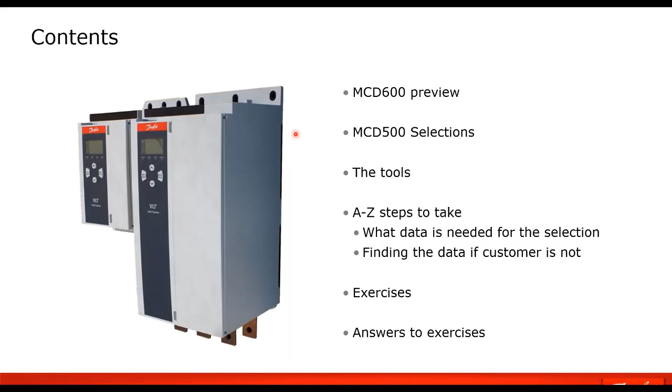We'll cover the tools that we use, and also some of the steps we take using what data we have and some customer information to pick the right soft starter. Then I have a few exercises, some examples of choosing it utilizing some of these tools, and then I'll go over some of the answers and some of the data that we found to help pick these particular sizes.

First off, this particular soft starter is the MCD 600. It's our newest soft starter in our series of 3-phase soft starters. It offers a lot of advanced features for motor control, protection, and fixed speed applications. I do want to mention that in our marketing of this, we call it the single speed drive. We have VLTs or VFD drives, which are variable speed, but soft starters are typically 1 speed.

I do see there's a question there: what COM cards do they have? Profibus, Profinet, Ethernet IP. I can go over some of the other features and options that we have later on, but yes, we do have Ethernet IP, Profinet, and so forth. I do have a secondary presentation if we have time to go over different features. But in this one, we're going to start off with selecting or properly sizing one.

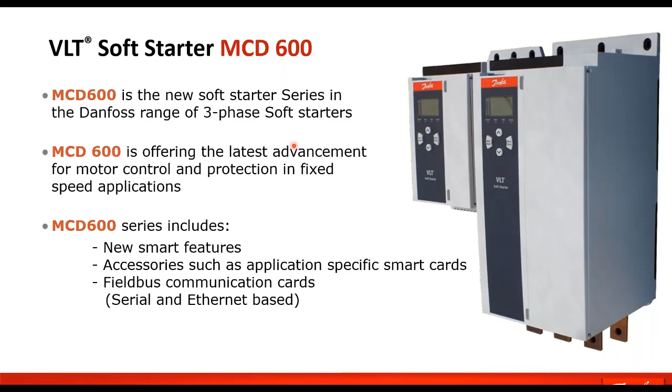Other features that it has are smart features, application type features, and fieldbus, both serial and Ethernet based. In this particular series, we have different current rating soft starters, and that is part of the type code. In most soft starters, you select them based on their current rating, and that current rating varies based on the starting currents that we need.

This particular soft starter has internally bypassed contactors, and what that means is this is a voltage limiting soft starter, and with the voltage limiting it is also current limiting. That's how we soft start a motor. But once it's done going through the starting profile, we get to full speed and current drops off. It then has contactors on all three phases that close, so the motor is essentially connected to the line through the soft starter.

The soft starter is still monitoring current for protection and other application features. This particular soft starter is considered a closed loop soft starter, as it is utilizing current feedback through current sensors inside to control the current that is being fed to the motor.

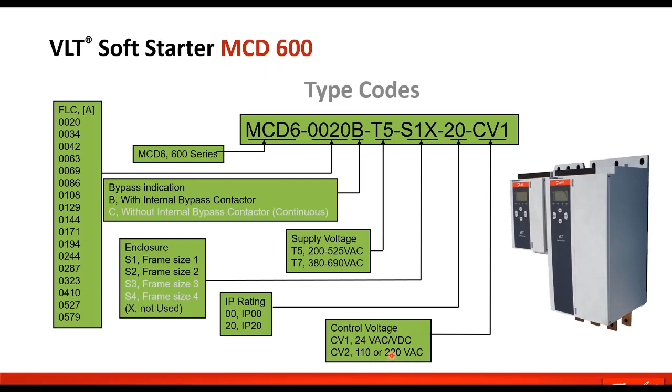Hey, Joey, a question came in. Yes. Does this soft starter have 6 thyristors? This soft starter is using thyristors or SCR controls. There are 3 modules, but yes, it's a total of 6. So there's a positive and negative for each phase, so full wave control. Some soft starters, which we do have a series, the MCD 202, only have 4. The middle one's just a straight through bar. Not all 3 phases are controlled using the control loop, but this particular one is all 3 phases.

So basically, selecting your soft starter: one thing, the size of the soft starter must match the motor and the application. Select the soft starter that has a current rating at least equal to the motor's full load current rating. Now, some of that can move around based on different things.

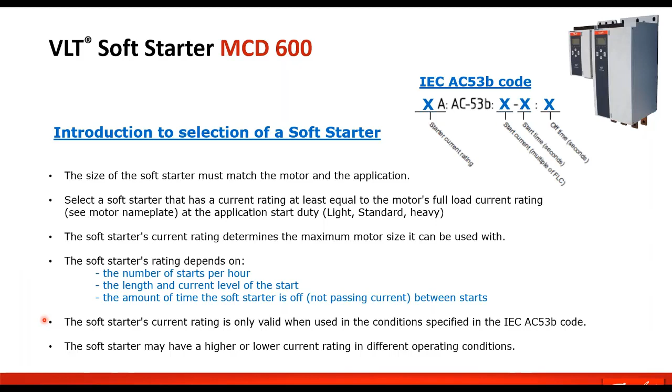And then there's also an off time. This is the balance between heating of the soft starter for how long it took to start, and then cooling time, and that has an effect on our selection. So the soft starter's current rating does determine the maximum motor size it can be used with, and that's in the table that I will show. Let's see, I kind of went through all this already.

So moving on, some of the tools that we have for the soft starters: communication setups, setup tools, which is our Danfoss MCT10 setup software. I will review that with you. WinStart. WinStart is a sizing program.

Yes, go ahead. A question came in regarding that. What are the communications options? Do we offer Profibus, Profinet, Ethernet IP? What are the options? Okay, let me just skip on over to that here.

Let's see. I lost my control panel stuff because I was clicking on something. Give me 1 second. View. There we go. There we go. Can you see this one, the feature set?

Yes. Okay. So over here, as optional features, the serial communications shows that we do have DeviceNet, Modbus RTU, Profibus through these serial comms, and then over Ethernet communication, we have Ethernet IP, Profinet, and Modbus TCP option cards.

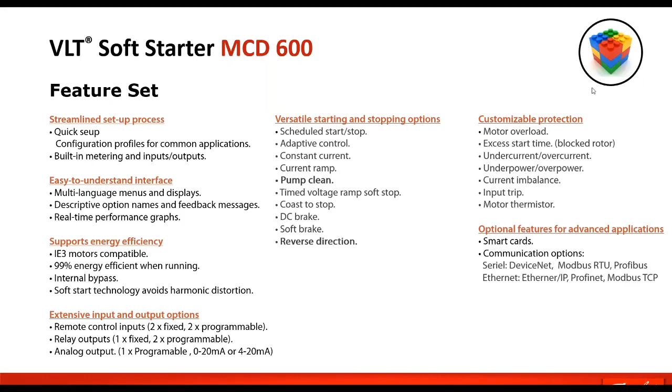All right. Great. And a question came in, how does it accomplish the reverse direction? It is another firing sequence, because yes, we are connected to the input. Of course, it has a clockwise rotation, but that's why I call it a kind of jogging. So it fires the SCRs in a manner that is mimicking a firing order that the motor is seeing, that is making the soft starter run backwards. I don't know if I'm explaining that well, but that's my take on it, that it fires out of order when the peak of the wave's coming by to make the motor start jogging backwards.

Okay. Are you seeing the screen now that says the tools? Well, I guess I can actually see my audience view. Ah, yes. Okay, I can see where I'm at. All right. Any other questions before I move on? Okay.

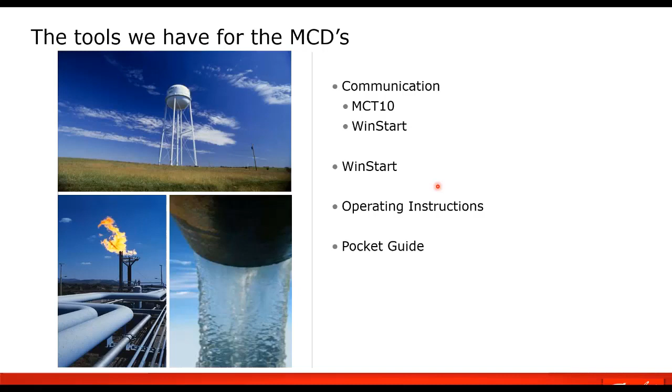So MCT10 is our setup tool that we use for setting up drives, but we can also use it to set up soft starters. In the case of the MCD 600, we have implemented that back in version 4.40, and I believe we're at 5.10 now. But at any version since then, if you already have MCT10, you have that function already.

Now, in the case of the MCD 600, you do have to add a soft starter connection, and I will show that here. Oops, come on. There we go. So under network, you can add and remove, and there is an add function for different types of connections, as well as we can do Profibus, serial, Ethernet connections to drives, and through a wireless LCP, but there is an Ethernet connection or a serial connection to soft starters.

And it will say serial AUCOM or Ethernet AUCOM. You pick that out and you can give it a unique name. In my case, I just called it soft starter. And then you can add to it a soft starter, which I've already done here. I just called it soft. Pick a size and you get the parameter list in here. Now with the 600 series, the parameters are loaded and saved via a USB connection, or a USB thumb drive file functionality.

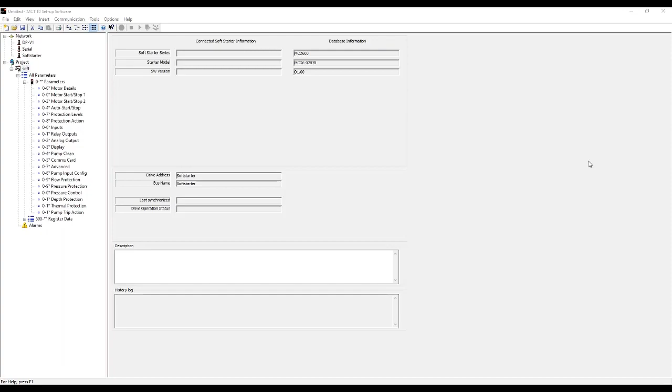Let me change back. Where was I? Oh, not on the presenting.

There we go. So through a USB thumbstick. So as you do your files, you would, okay. So again, once you have all your parameters set, you can right click on the project or on the MCD and you can export it to a parameter file that can be loaded on the USB stick. Same way in the soft starter, you can pull the parameters and import it into MCT10.

Go back here. The tool is free. The MCT10 setup software is free to download on our Danfoss Drives website.

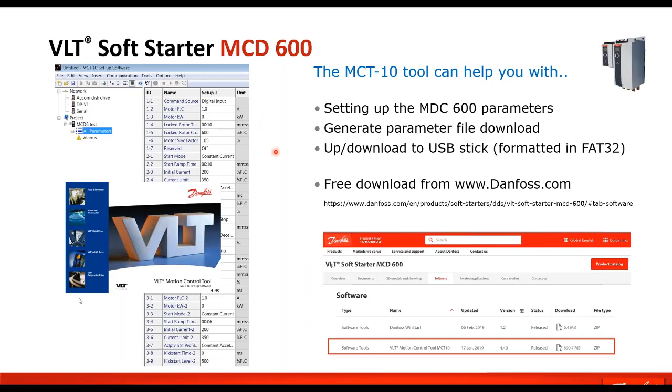Another tool that I've mentioned is the WinStart program. There are two available out there. There's a WinStart for our older generation of soft starters, the MCD 200 and 500. And then there's one now for the MCD 600 and more updated version. It has a couple of different functionalities built into it. You can use it to find the max full load current of a particular soft starter if you have one. You could also use it to select a model for a certain application.

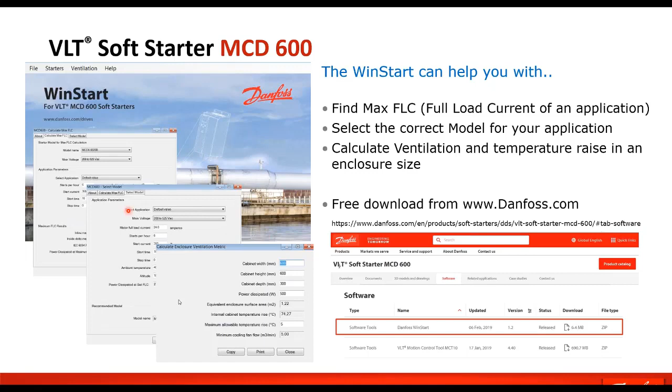One thing is we were mentioning earlier as far as how much starting current do I need for the application. In the program, you can load it if you know already, but there is a selectable application and it will autofill typical things. It will tell you what the starting current is, and it will fill in some times, but you can modify these settings and it will change which soft starter is proper for that particular application. This is again a free download on our Danfoss Drives website.

Utilizing this tool, in finding the full load current, you pick a model, the voltage. You can pick an application, it will fill this in, or you can enter it in and it will give you the ratings as we're talking about down here. It will also give you the dissipated watts at full load current for sizing panels that you're putting it in. There is also a panel sizing or airflow function built into this new version of WinStart.

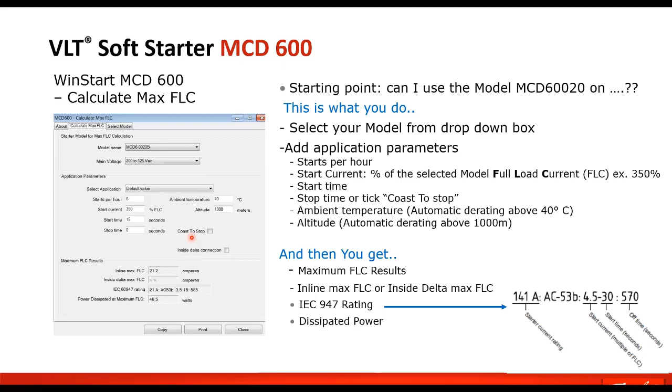So in this one, as it shows, selecting the model, again, you can select an application, the voltage rating, and you can select the motor rated current in here, and it will fill in these, but you can change the starts per hour. It will autofill in the starting current, but you can change that if need be, the starting time necessary, stopping time, or if you're coasting to stop, the ambient temperature, and the altitude. And it will give you the power dissipated here and the model number at the bottom. You can also select an inside delta connection.

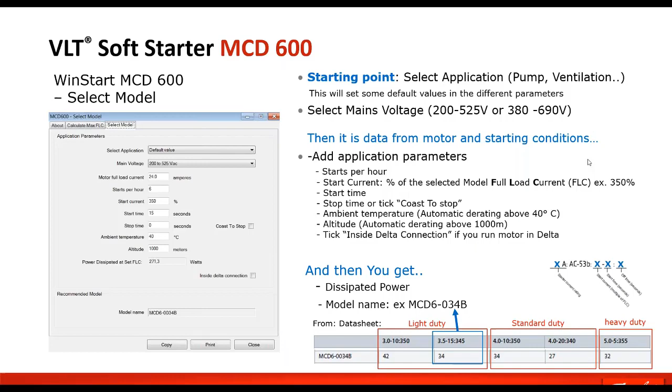One of the questions I get is, what is an inside delta connection? Some people know, some people don't. I was looking actually a little bit for what is an inside delta connection. I did find a pretty good explanation here from one website. Our friend Google can find all, but an inside delta connection is a 6-wire motor. Generally, it's got the 3-phase windings, and they are individual. You can get to both sides of them. Typically designed for use with star delta starters. This actually helps if this is the type of motor. You can use a soft starter with it instead.

The importance of selecting that is, because it's only handling kind of half the current going through, you can get away with a smaller soft starter. That's why that is a selection for picking the soft starter. If it's a star delta, you can basically almost half it in a way. Kind of a look at how a star delta connection is: as you have the 3 connections, it will connect it in a star for starting and then change over to delta for run. When you're connecting a soft starter, we are in the delta mode, and then just limiting current for the starting.

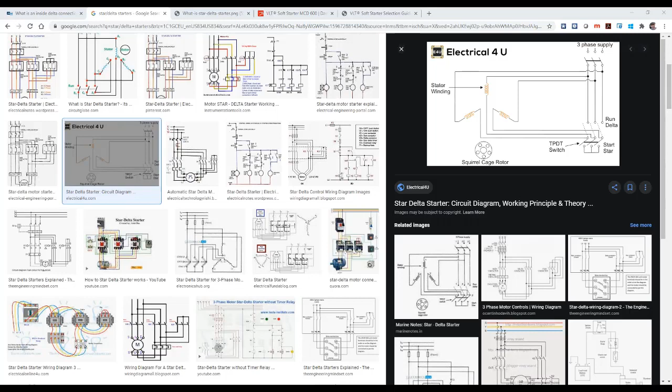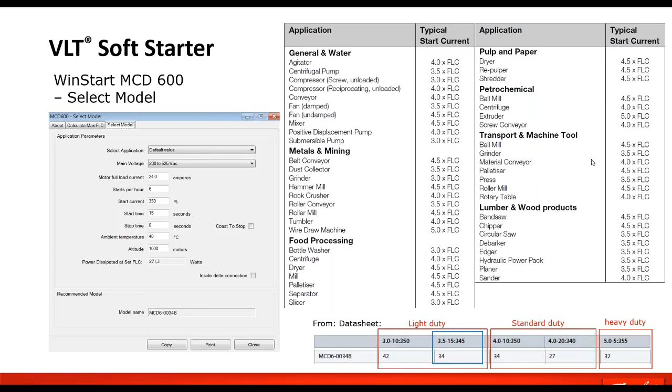This is one of the tables that I have that's in one of my older manuals. It does give general different applications and what is the typical starting current for each application. Picking it in the WinStart will do the same thing. It will fill in these typical numbers. There's also some guides that we have available. Let me find one here. There's one that I did share. One of the guides I want to bring up is this guide here. It has an easy table based on some horsepowers, but you do have your full load current ratings and then which soft starter it is.

Now these tables here are assuming a couple of things. These selections will get you right about where you need. This is kind of a handy guide for picking, but sometimes it will be at least a little bit larger. I would use the WinStart to get a more accurate selection, but if not knowing some of the things as far as the ramp time and starts per hour, this is a pretty good table for picking.

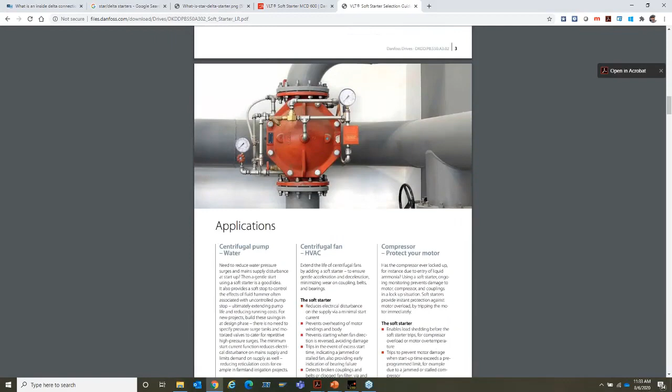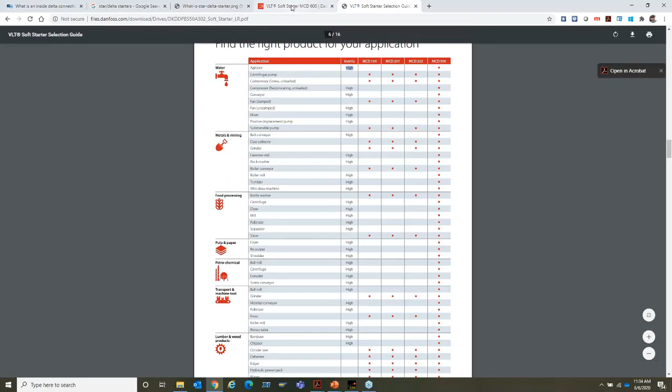Again, we get to the different duties, and this is where some of the selection guides that we have out there will have the same kind of situation based on different types of applications. This one goes by inertia, which I would say is more the weight, the more current it needs to start. So this would be a heavy duty, and the ones not listed would be a standard one. With this in combination with a table, whether it's standard duty or heavy duty, which soft starter do I pick? But again, we always pick them in relation to their current ratings, but current and horsepower kind of go hand in hand.

Another function in the WinStart software is the ventilation enclosure cooling calculator. You can calculate based on metric units or imperial units, inches or degrees Fahrenheit. In there, you put in your cabinet size, the power dissipated, which we found from the soft starter itself, and then it will give you the enclosure surface and the internal rise. In this one, it shows 74.3. So this would be the temperature in degrees C in this particular case, with no fans. But if we need it to not go higher than 5 degrees rise, then it tells you the minimum airflow that you need to ventilate the cabinet.

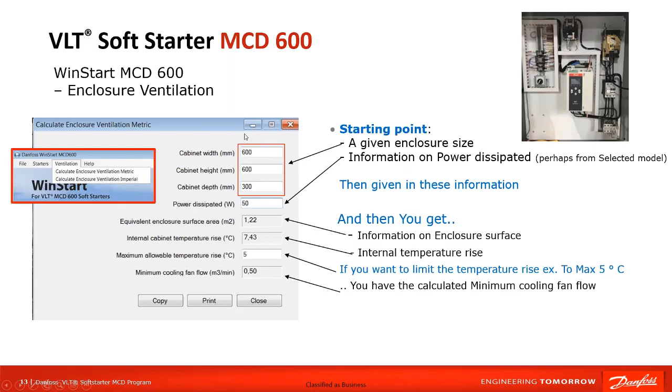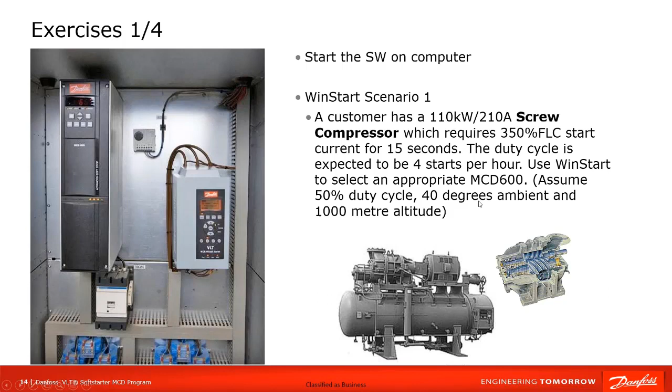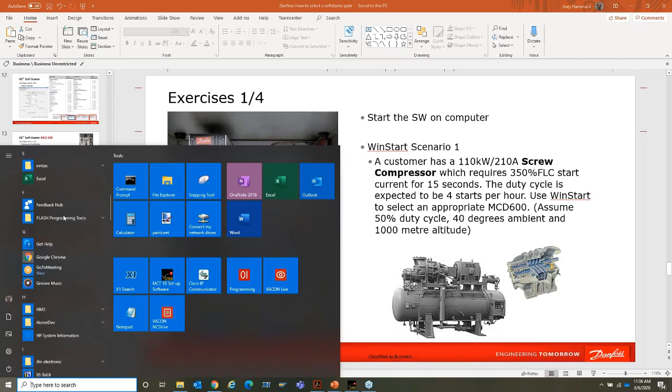I'm going to go ahead and demonstrate with the software some of the scenarios where we're going to size a soft starter. So let me exit that. I thought I already had it running, but I will start my WinStart. I'll show choosing this at different tables and such. In this scenario, we have a customer with a 110 kilowatt screw compressor, or 210 amps. We know this already from the customer. It uses 350%, and we can also verify that in here. They want to start for 15 seconds, and the duty cycle is expected to be 4 starts per hour.

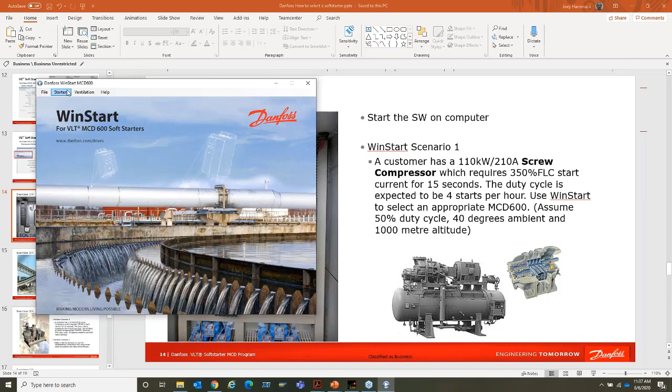So we go here to starters. We're going to pick our soft starter, and select model. Here, as I said, there's different applications. In this case, we're going to do a screw compressor, and there's 2 different kinds: starting loaded and starting unloaded. Most of these will have an unloader to start running, so we're going to pick unloaded. You see it put the starting current here at 350%. If I do the heavier duty one, loaded, a little more current's needed to start. You can see starting current's 400% here. But I'm going to go unloaded.

Current rating of the motor, 210 amps. You see the number changing down here at the bottom. 4 starts. Then I do have to click to another one for this to update down here. And my start time is 15. It gives us our power dissipation in watts and our model. So in this case, it needs a 244 amp rated soft starter.

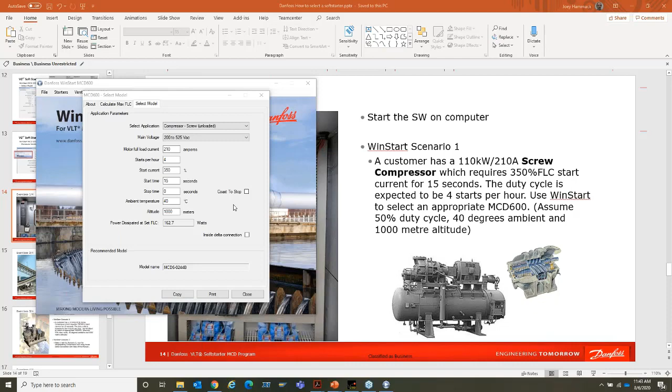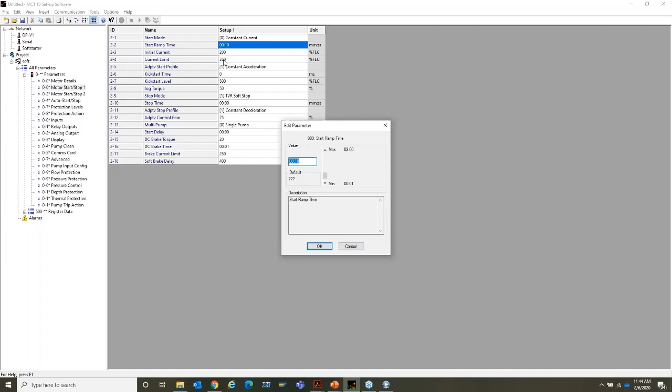Basically, whatever I'm limiting the current, the application will determine how long it takes that motor to get to full start. Of course, the higher I set this limit, the faster that motor's going to start. This will more monitor if it's starting to take too long to start from what I've set. And the other protections built into it, we have selectable protection limits: current imbalance, undercurrent, overcurrent, under voltage, over voltage, under power, over power, excessive start time, restart delay, and starts per hour.

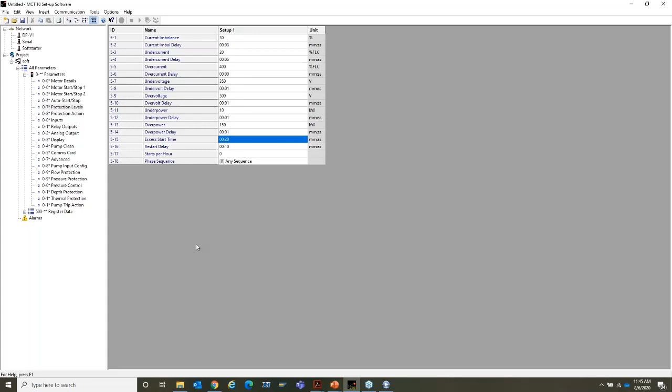That's a good one. How does it handle a thyristor short? The MCD 600 does have a unique feature in it, actually. If one of the thyristors shorts, it can alert you that one of them has failed, but it will go into a two-pole control mode. It will actually close that contactor and you will still be able to start through 2, but it will give you time to do a replacement while the soft starter has been damaged.

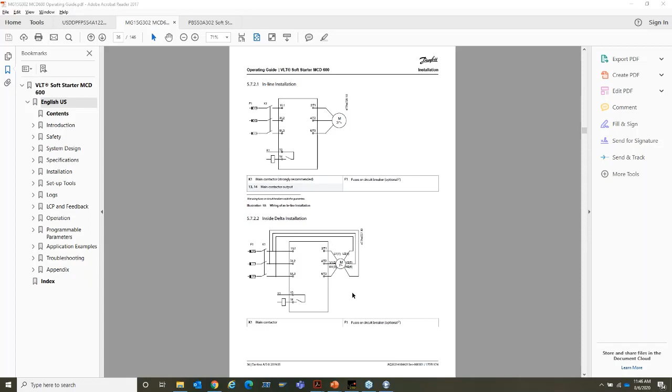Now, that's a good point, as I showed with the inside delta. We do suggest for soft starters to have an isolation contactor in front of it. The soft starter can control it for starting and stopping, to close it before the running sequence, and once it comes to a stop, it can open it. Reason being, through SCRs and the filtering, even in stop mode, there will be leakage voltage seen on the output. For safety, it is suggested to have an isolation contactor in front of it so that there's no voltage on the output.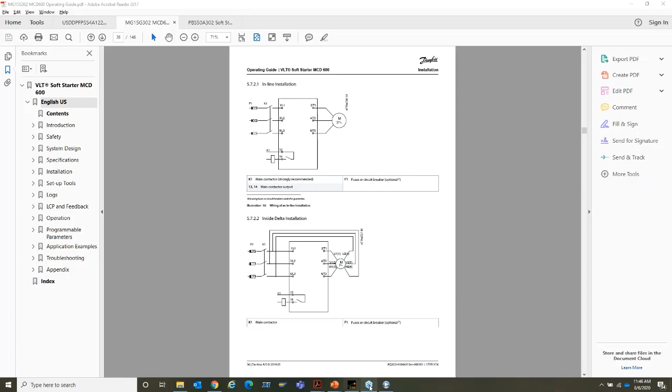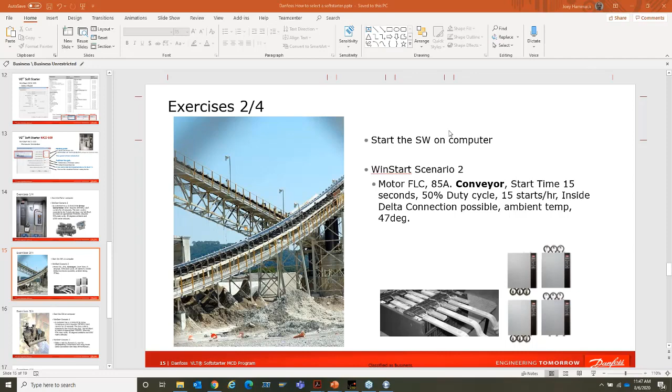All right. Scenario number 2. We have a conveyor here, 85 amp conveyor. Start time is 15 seconds, 50% duty cycle, 15 starts per hour. This one has inside delta possible. And then ambient temperature is 47 degrees. So we will make a change here. We will do a conveyor. And looking at this, say it's a belt.

Okay, a little more heavy duty right away, 450% we see here. Current is 85 amps. Doing 15 starts per hour. And see the change here. I will go back to this. At first it was 144 amp. Starting many times, it's going to warm it up. It needs to handle more temp, higher current. Change it to 171 amp.

Start time is 15 seconds. Brought it down again. We're not spending a lot of time heating up. Remember, these are internally bypassed. It allows it to be a little smaller and cooler when it's in bypass mode. We're not firing the SCRs all the time, only during starts and stops. I didn't remember to do the temp. Temp actually brought it up. It's a hotter environment. So now our pick is the 144 amp soft starter. Now we do have an inside delta connection possible.

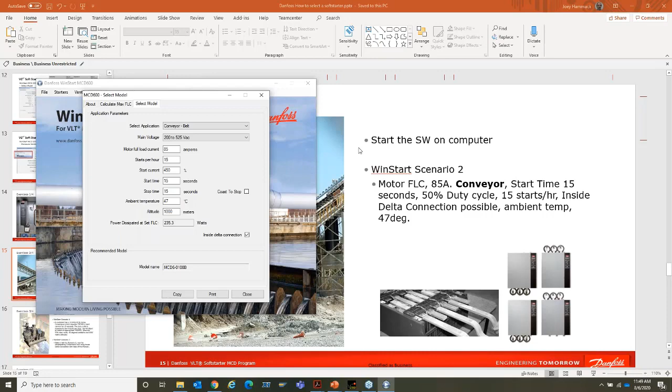Inside delta, 108. So all the calculations, as we're changing, it is changing which one we are picking. I will say at the end of this presentation, I made a mistake in my calculations here because I forgot the temperature in this example, just so you know. Okay, it's down here. When I get to the end, I have what my answers were. And this was because I forgot the temp.

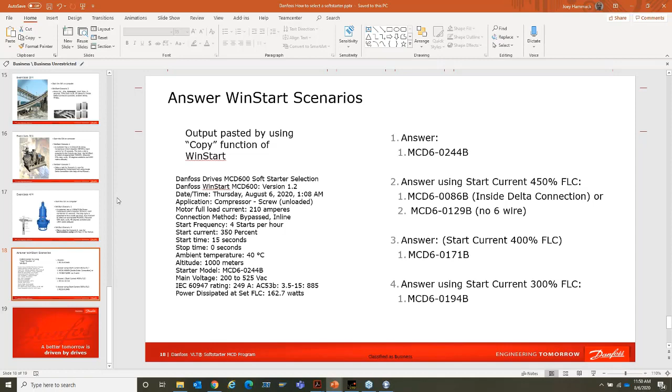Scenario 4, or 3. Kind of the same kind of motor as earlier, same as scenario 1, but instead of a... what was the first one? A screw compressor. We're now using a reciprocating compressor, and we are using an inside delta connection. We can use the manual for help in this case. Now, a reciprocating compressor is big pistons, a lot of inertia, kind of squeezing air.

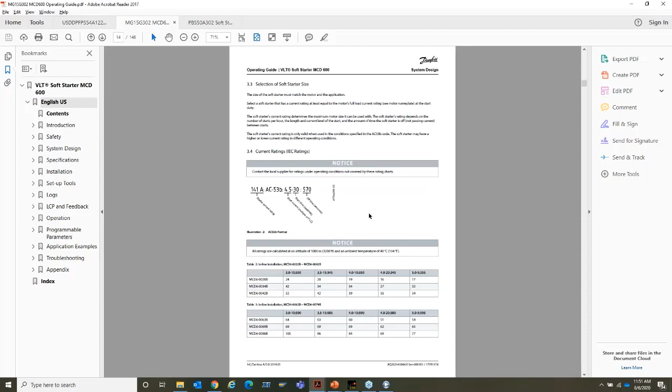If I was using the manual in this case, I just go to that and go, let's pick there. Now we know it's a heavy duty inside delta. So we do have a table for inline installation here, or inside delta. We know we're at the heavy duty range, and it was 210 amps. This one's a little too low, so I would go 235. We're talking the time. I could probably go down a little bit here, so I can go a little bit smaller and utilize this soft starter.

Now it depends on, see, I have 4 times current here, or if it's heavy duty, I think it might be more in here. So yeah, 171B. So these are the motor rated currents that I'm using based on these rating numbers. So I'm kind of going backwards, right? If I use this, we can see a difference here. So we had before a screw compressor. I'll change the numbers back. What do we have, 4? 15 seconds. And we're just coasting to a stop in that case. I can even check mark that, it just zeroes it out.

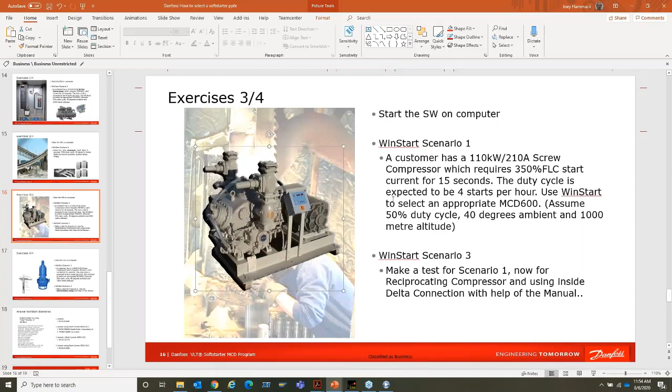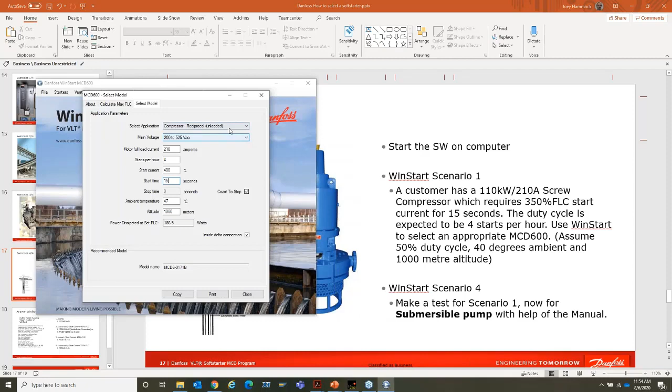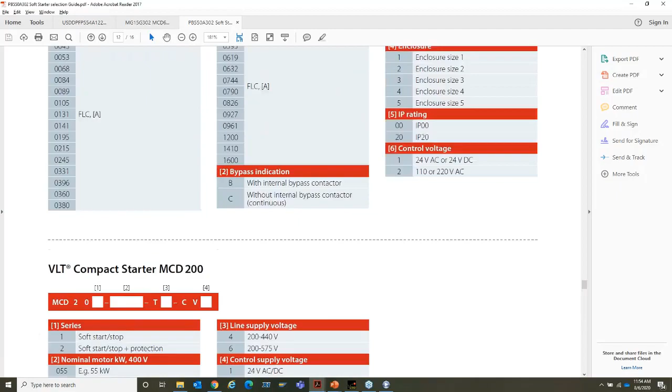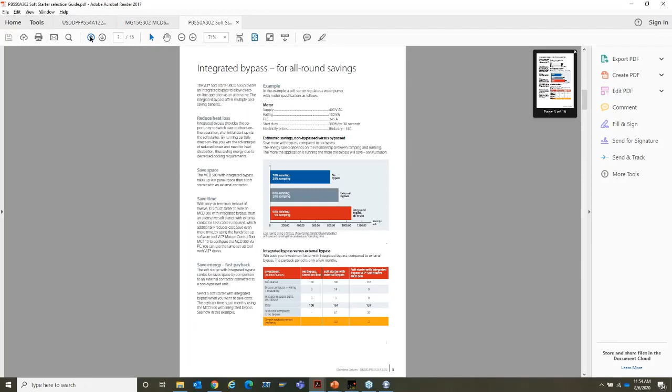All right. Third scenario, fourth scenario. Same kind of motor as before again. This time we're going to use a submersible pump. So let's see. What is a submersible pump starting current? Would that be heavy duty or light duty? I can look at a selection guide, take a look if I have those tables in here. Hello. Ah, not that one. It was this one, I think. Let's make this smaller. Yeah, this is. There we go. What do we got? A submersible pump. It seems to be a normal duty.

I can put it in here. Being we're using this anyway, let's go down to pump. And I got different ones in here: a submersible, centrifugal, positive displacement, or a slurry pump. Let's do a submersible. It popped it at 300%. It's a pretty light duty start in this one. They also made it smaller here. We're not doing an inside delta connection in that one. Brought it up in amps. 210 amps, still can use a 194 amp soft starter. Do we need more starting time? Numbers change.

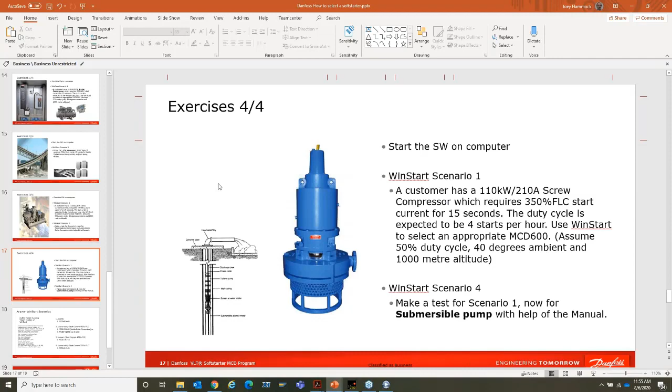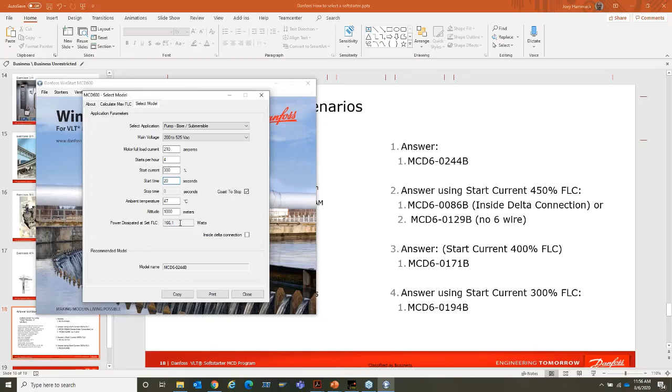So the software does make it easy to help pick different soft starters based on different starting current, different applications and such. If you are also picking that, we do have a copy or print this out, and it will print out, same as here. This is actually a copy from it and pasted right in here as I'm getting ready for this at 1 o'clock in the morning. But I did the screw compressor, the first one, and it added a little more, including printing out this IEC rating.

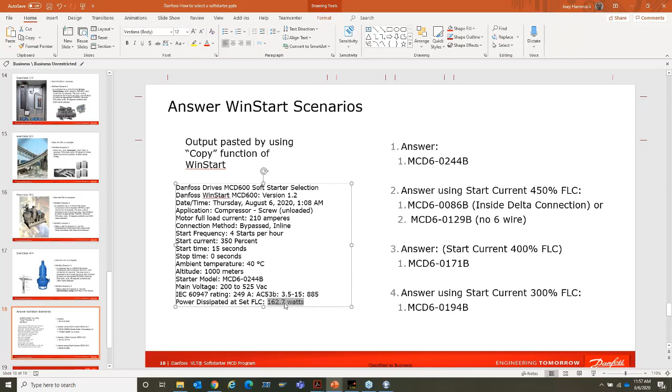So even though the basic current as we printed on the label unit's at 244 amp, that's based on some other standard starting, but it can handle 249. So it's a little bit higher rated based on the starting conditions and the power, and it also gives you the watts that it's going to dissipate. And that's all I have for you today as far as selecting and sizing of a soft starter.

Joey, there's a couple other questions. I don't know if you want to address them or not. Sure. Let me find that. I'm not looking at it. Let me go to the questions.

I put answered by several ones you've already covered. I'm having trouble getting this to show up now. Right. You can drag it to a different part. Oh, okay. I drag it out of the column so it's easier to read and make it bigger. I had it in the main screen, and I think either it's there or I lost it. And I closed it, and I think I lost the connection to it. Can you read it to me? I'm sorry, I can't see it now. Sure. Actually, I saw it when you just did it. It was next to the bottom. Oh, you can see my screen on here? Yeah. Show all your fields. I'll show you which one it is. Alt tab. Show them all. Oh, I see. Well, no. Now it just went away, huh? No, it was the first one. It's probably hidden behind it. Let's close some windows here. Yeah, it's just hidden back there. So I probably stuck it, no, I messed up somehow.

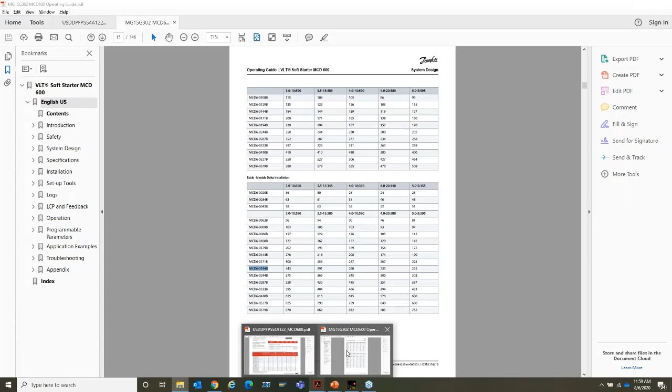So. Is there a way to get the MCD 600 with line connections on the top? This is easier for a retrofit application. Let me see here. And I think they're all on the bottom. Some of the drives we have like a side mount kit you can do. Yeah. There used to be the other one, which I know the 500 has the ability to move them. I think the smaller ones, they're all on the bottom, or they went through top to bottom.

I think not in this one because the smart card and the digital inputs are on the top. So they're trying to keep with the safety ratings. You can't mix the low voltage and high voltage connections, they've got to be separated. But it's also the way the card is, all the options now slide into the top, and that takes up the room, unfortunately. I think when we get to the bigger ones, then yeah, because the control will be more on the side, it'll be more like the older ones with bigger bars and they'll be movable from top to bottom. But these smaller ones with the internal bypass, it's all on the bottom and they're pretty small actually.

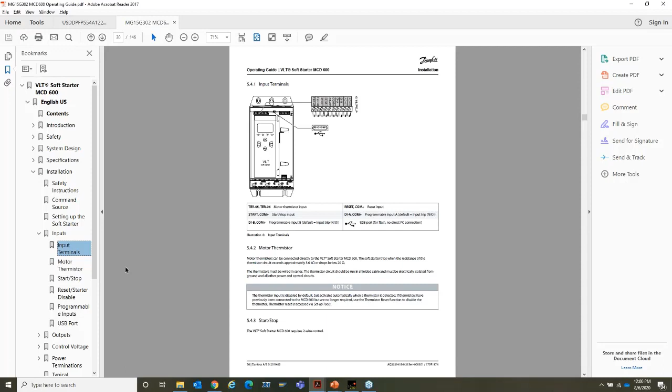I'm not sure you answered this or not, but how do we handle the thyristor shorting? An isolation contactor? Yeah, this was the one I mentioned that the 600 has this ability to, if one of the SCRs fail, it will basically close the bypass contactor internal to it, and it will do kind of like the MCD 200 where we have two controlled phases. So it will still stop the motor and soft start it, as well as alert you that there's damage to the soft starter, but it won't stop your application from functioning. And also, you can schedule replacement.

Excellent. The last question, and I guess I wasn't paying attention. Somebody thought you had mentioned medium voltage soft starters. No, I didn't mention that. I did all low. Yeah, I don't think we do the medium voltage soft starter at this time. At this time. Okay.

Joey, there's no other questions. You did an awesome job.

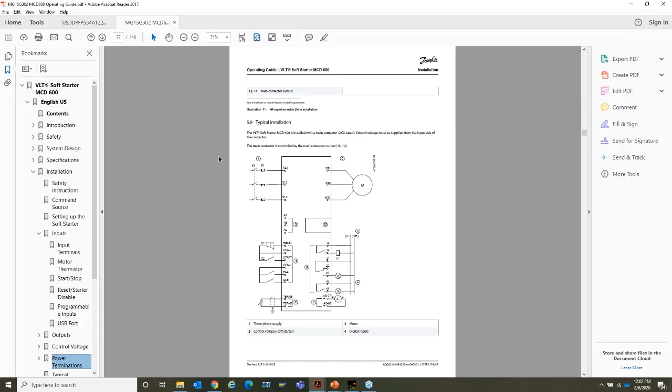There's a lot of different ways to size these soft starts and you get different answers. We've literally doubled the amperage. I tried to show all the ones. I had a complaint that this table oversizes them, but this is using the NEMA, which is more in the US, and also doing the horsepower. And in some cases, bigger is better. I hate to have one in the field that's undersized and then it doesn't work. It becomes more of a headache. That's why I caution when there's a split just by a size. Some of these are physically the same size anyway.

I know there's a cost difference in some of it, but if there's any questions, please feel free to give us a call and we can look over all of the conditions and pick the right one, especially if we're talking a difference of $1,000 or something. But if the budget is there and it's on the hair, because things do change over time, sizing some things right to the limit can hurt you later.

Right. The software does take that into consideration. That's where it sizes it properly. So that's where I do like the software. It does pick it right, and you can play with some of the numbers and make a somewhat educated decision.